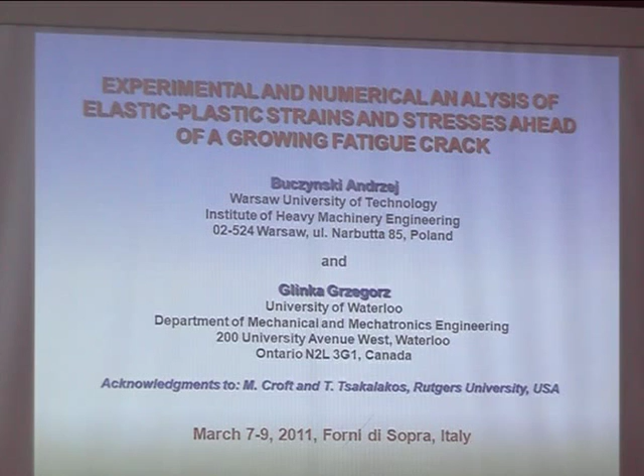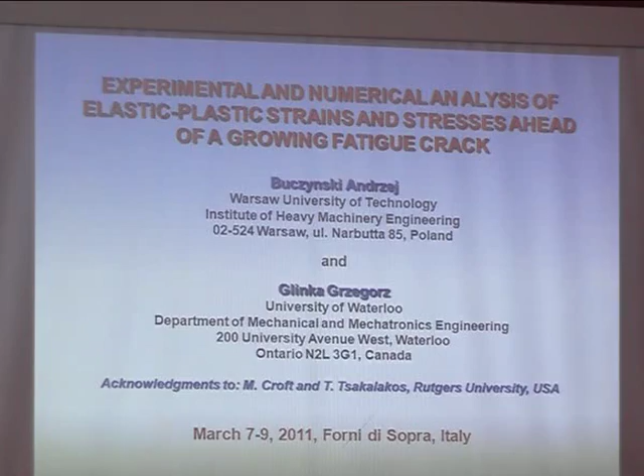It's the first time my performance was recorded, 40 years ago in Sicily when I played accordion at the festival in Messina. And it was a very successful one — I almost got married in Sicily. So now it's over, all these opportunities are over.

The main goal is very similar to what the first speaker was talking about in the morning, that I would like to analyze and find out what's going on simultaneously ahead of the crack and behind the crack tip, without being biased towards whether closure exists or doesn't exist, and what's going on with overload and after overload.

In America, I am sponsored by the Office of Naval Research for the last couple of years by Vasudevan, who doesn't like closures very much. So I am kind of quite a politician, because I get money from them, but at the same time I try not to say that closure doesn't exist. So far it's working.

So here you see — what I am saying is closure does exist, but maybe it's not doing what we think it does. So it's not the same.

What I wanted to know is to compare, using a finite element code, the stationary crack in identical boundary conditions and the fatigue crack, which has some history. Because we cannot do it experimentally, since you cannot produce a fatigue crack without a history. Then we'll see what is affected, what the differences are.

In order to do that, we wrote our own finite element code, because when you run Abaqus or Ansys, you actually don't know what's going on exactly there — how the error is handled, how you jump from one element of the stress strain curve to another, what's going on in the corner. So we did everything ourselves.

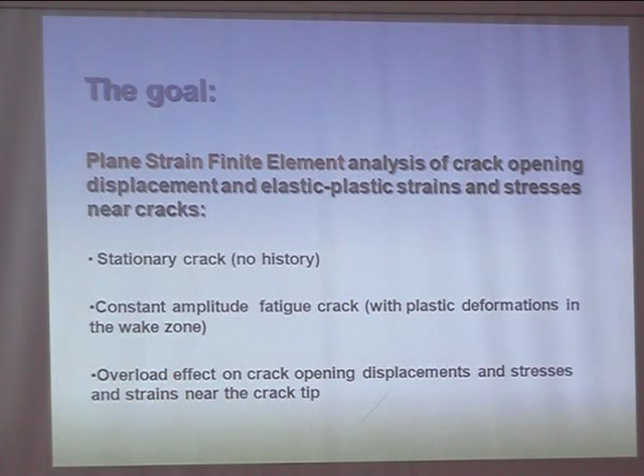Then we ran the constant amplitude, variable amplitude, moving the crack using a specimen like that, a compact tension specimen. We were trying to model the 4140 steel, which was tested later by my colleagues Mark Croft and Tsakalakos using the neutron diffraction method. So we were getting even some experiments.

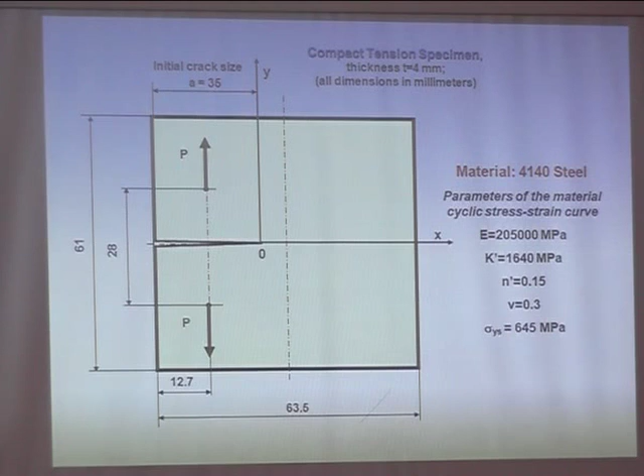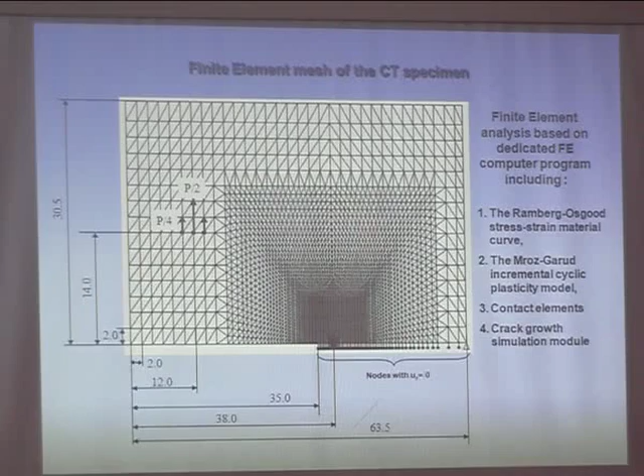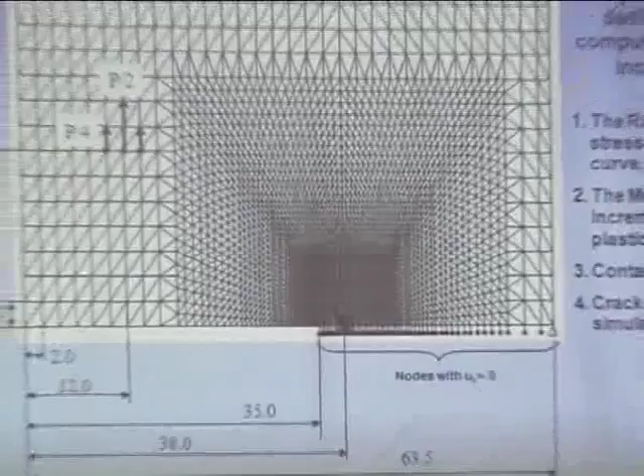We made most of the analysis when the crack reached 38 millimeters, but we started propagating it from 35 to build the history. Because of that, I was making the elements smaller and smaller and smaller. So when it came to the point of taking the data, that was a very fine mesh, and contact elements were introduced there. Everything we knew was going on, so we knew everything except the truth.

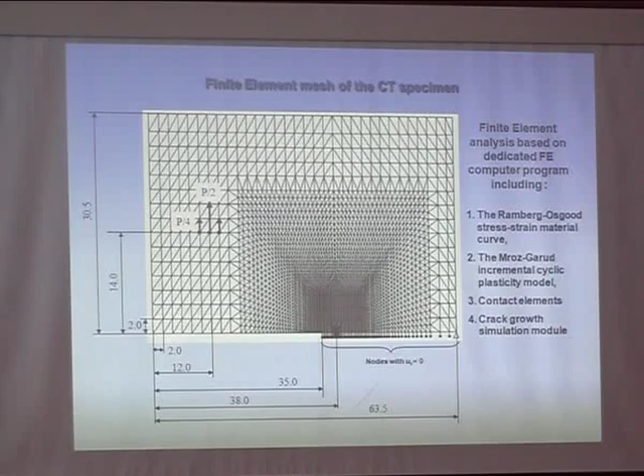My colleague did very nice graphics together with it, and everything was written in Fortran because he's an old-fashioned man — he doesn't believe in C++. We have to know exactly what's going on in the computer memory just to be sure. So he was even showing by colors which part of the stress strain curve that region is — the first element, second, and third — so you could see how the memory was working there.

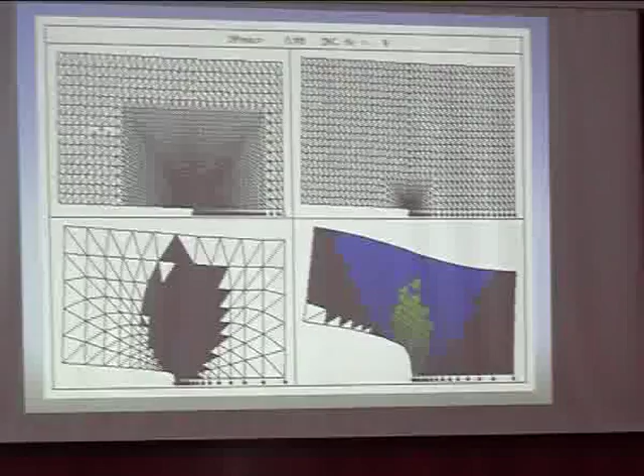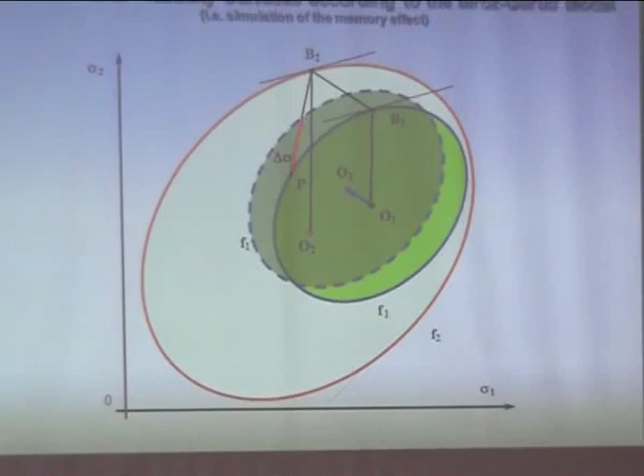Of course that took us — I am ashamed to say — you don't believe how much the calculation took time. It is plane strain, elastoplastic cyclic analysis with incremental plasticity using Mroz's model, because Mroz is my professor and my colleague, so I am biased, of course.

This is the best model I know. It was corrected by Garud a little bit.

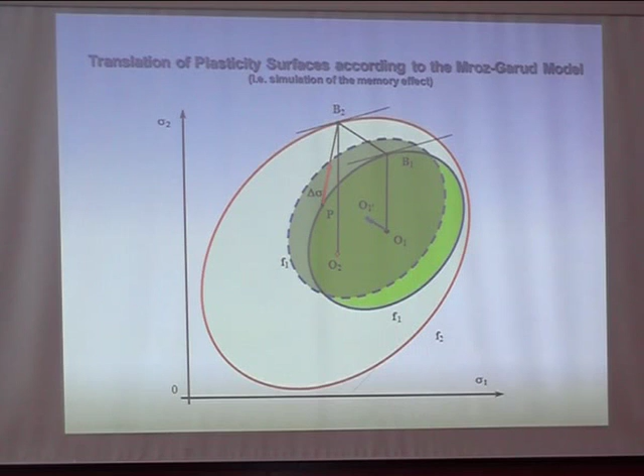So this is the famous plasticity surfaces proposed by Mroz, and you translate them in the stress space. That's why you model that Bauschinger effect, memory, and the cyclic loops, and so on. It's a lot of fun doing it.

And this is how we did the entire program. So I started from 35 millimeters, and then we applied a cycle, as you see, 10 increments per one reversal, but actually there were more iterations, because if that increment went over from one element of the stress strain curve to another, so we had to back up everything and find such a smaller increment here that you ended at the end of linear elements, and then we went further on.

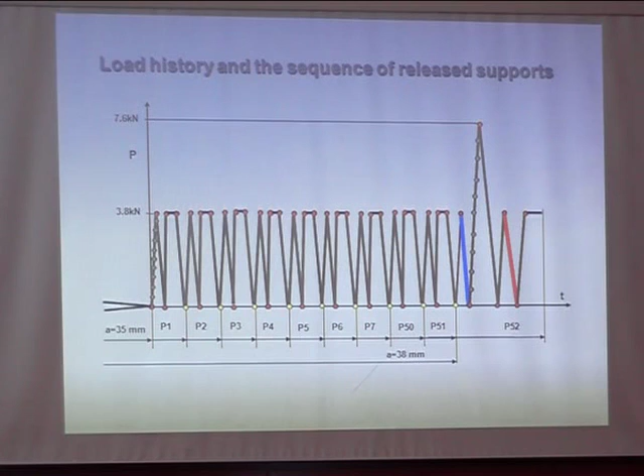So there was a lot of iterations between. This is how we were inputting, but the computer was dividing the stress strain curve even smaller elements just to follow exactly what was given, because otherwise we would accumulate a lot of error. Then unloading was the same way, then reloading, and then we kept the load constant, and we were releasing the first node incrementally again.

That's why the multi-axial incremental non-proportional plasticity was incorporated, and we were doing it cycle by cycle until we reached with smaller and smaller elements. So there were huge amounts of those increments, because we reached that point, and then I analyzed what's going on, what was going there, then we went up, returned, made one cycle, and I analyzed what's going over there. And later on we progressed it further to the maximum retardation point in order to see what was going on after that.

Just let me see whether I mentioned everything here. Yeah.

So I know that I modeled the geometry of the crack tip correctly. And I didn't know, so a couple of years ago we solved that problem analytically for an elastic body, that I formulated the crack problem as a moving boundary problem, so the final boundaries were satisfied on the final geometry, and that way I could derive the relationship between K factor and the radius of the crack tip.

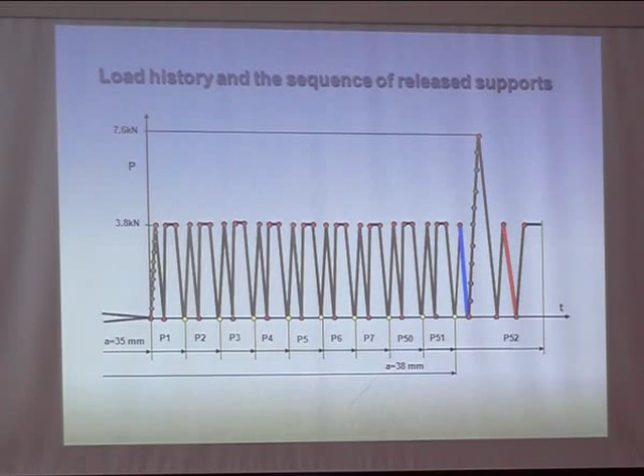The only problem is that I was using small theory elasticity, because if I used large deformations, I couldn't solve. So therefore the stress at the crack tip, at the blunted crack tip, analytically, was equal to the modulus of elasticity.

And when I wanted to publish the paper, one of the reviewers was claiming that my solution is unrealistic because I got very high stress, which is equal to modulus of elasticity. So I responded, you like K factor, when it goes to infinity, it's okay. But when it's finite, it's not okay. But anyway, I believe the displacement fields are okay.

So this is how I chose the element size. It was extremely small at the end, around 1/100 or 1/200 of a millimeter, just to make sure that it was few times smaller than the theoretically possible radius which I calculated analytically.

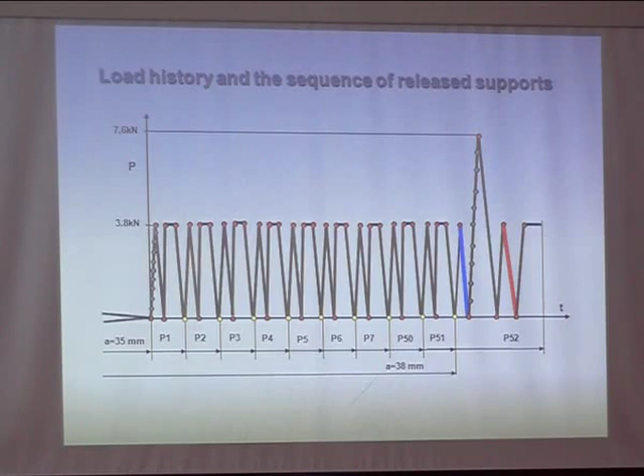There was a contact here, and there is a contact like between these elements, but I don't know whether this is something real or it's coming from this huge rotation when I'm using the small deformation theory. Now, when I calculated the pressure here, or the nodal forces, they were pretty small, so I'm not sure whether it's a real closure or not, but let's look here.

So behind the crack tip, there is a hole, and experiments actually done by nice photoelasticity with a high resolution in Australia by Lewis Jones, show that there is emptiness. He just didn't see anything behind the crack tip. It was a black hole, like nothing was happening in terms of energy and dissipation.

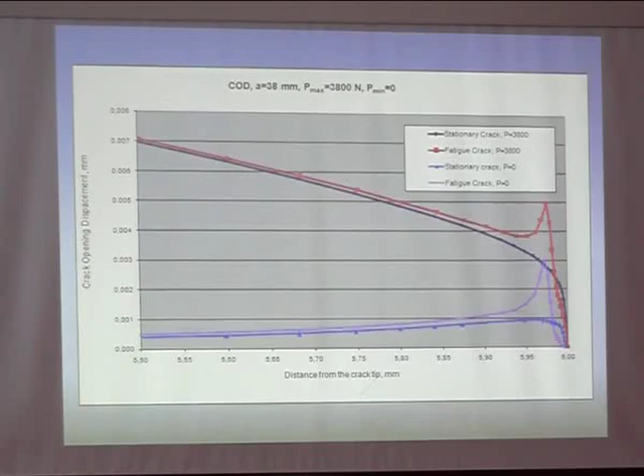And this is a good one, they're mathematically correct, so it's nice, isn't it? The distances on the horizontal - this is the crack tip, and this is the distance. So this is over 5/10 of a millimeter. Okay, that's the distance.

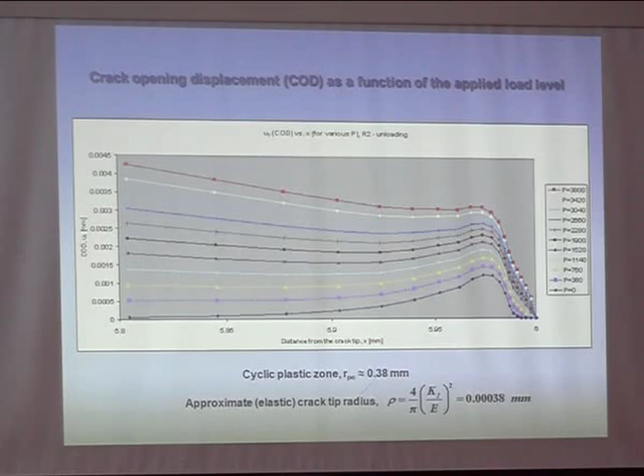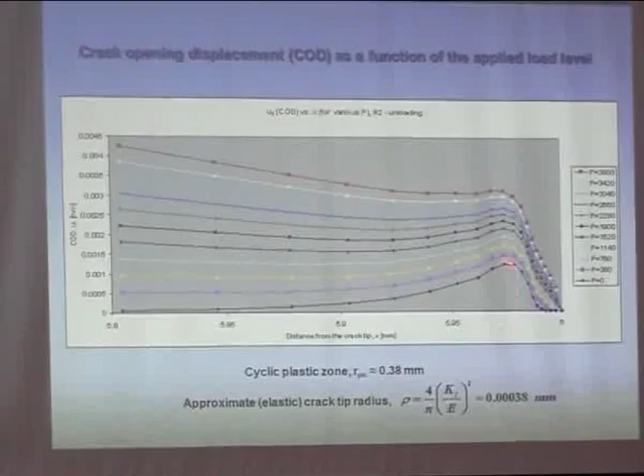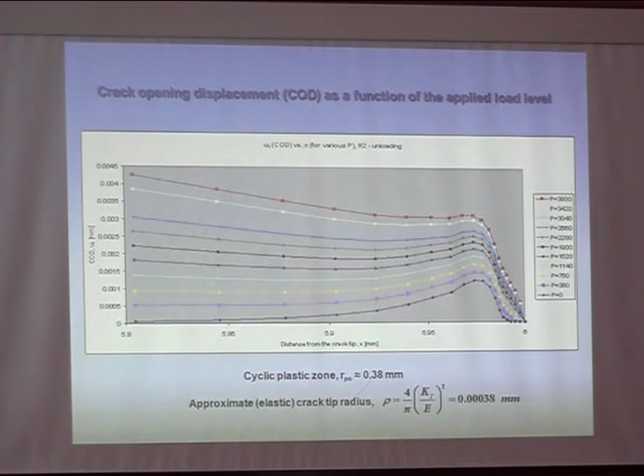No, the crack tip is here, that's the opening, and the stress field will be here. This opening we have also seen experimentally, and it must occur, otherwise you would never see a closure behind. Furthermore, you need this volume here for the representation after - this is the emptiness. So I concluded that I can model the crack as a crack with a radius always, empty hole. Even if you apply now compression, you will get a nice hole here with the concentration of 3. That's what my computer says and my model.

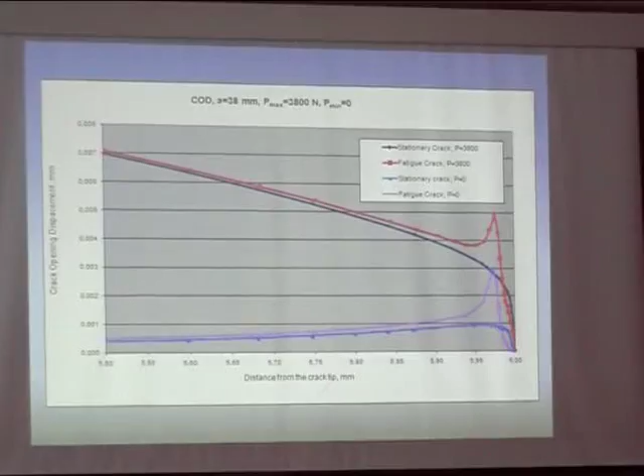Now we went to the comparison. I said, okay, let's zoom it a little bit. So what you see here is a 0.5 millimeter distance. I did the same calculation for a crack without history, what I called virgin crack, which was elastoplastic, everything the same, except that crack was not propagated - I only started with 38 millimeters. So what you see here is the displacement field for the fatigue crack, and that one is the displacement field for that virgin crack at maximum load.

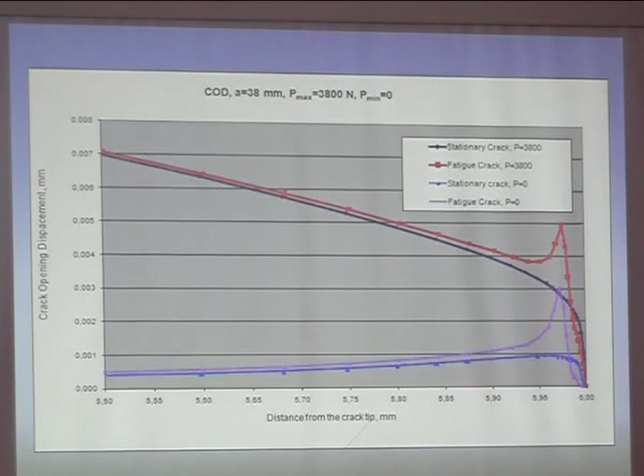When we went to the minimum load, here again is the displacement field at zero load of the fatigue crack, and this blue is the virgin crack. So when we compare them, and I zoom everything a little bit, you see very clearly this is that kind of ideal crack without history, and this is crack with history. There are two different displacement fields at the same K, the same crack length, everything the same.

So if there are two different displacement fields, my conclusion is that there are two different stress intensity factors. Therefore, the history of the crack is affecting not only the minimum but the maximum as well. Should we take it into account later or not is disputable, but that's what I am finding, and this is in agreement with your experiments.

I almost jumped when I saw it, because for the first time, the Canadians and British agree over the ocean. And I think this is because the Polish scientist is negotiating.

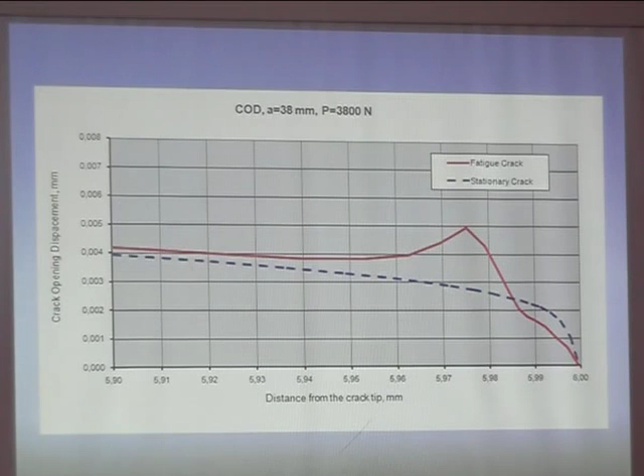Of course, when I said this first, my sponsor was very happy. Jim Newman said that I am talking nonsense. But we negotiated with Jim and it's okay now.

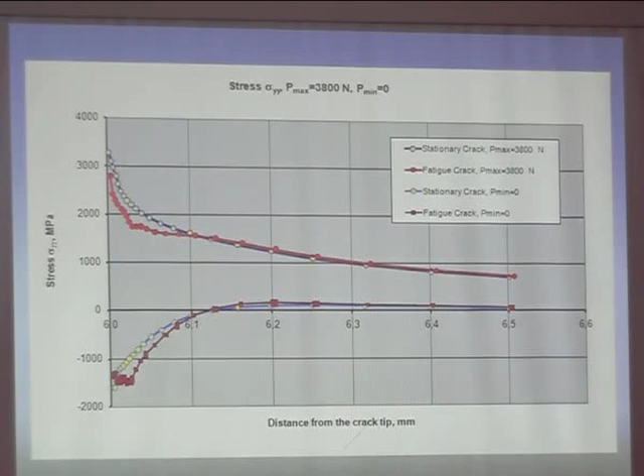But you see, this is only finite element - it means it doesn't need to be necessarily 100% true, but qualitatively it gives us something. So what I did next, I said let's go to a point ahead of the crack tip and see what is the stress-strain response. So I chose, as you see, the fourth node in order to be away from that first element, which was corrupted so much because of huge rotation and deformation.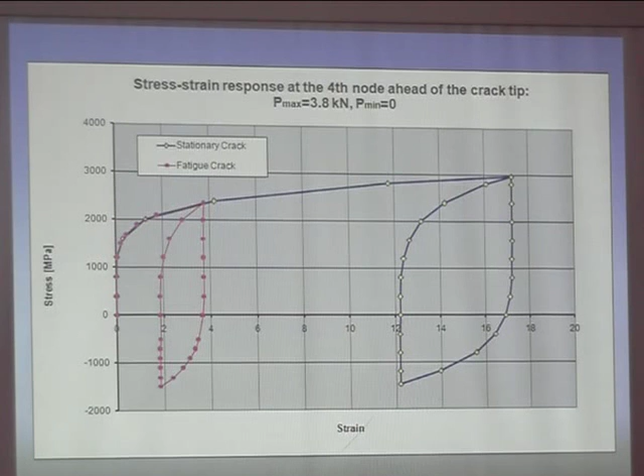The results were pretty consistent throughout that case, but it was interesting to see what's happening before and after overload. We applied the overload and propagated the crack by 1 or 2 elements. Looking at that was surprising to me—this is the displacement field after overload, and this is the displacement field at the minimum load after overload. So this is the maximum, this is the minimum.

What you see here is that after reaching a certain load level, the displacement in this region was getting a little less, but in this other region, the displacement seemed to be the same—they don't move. So if you measure the relative change of displacement behind the crack tip, you would assume this is closure, because the opening displacement doesn't change anymore. But that doesn't mean the crack is actually closed, according to this analysis.

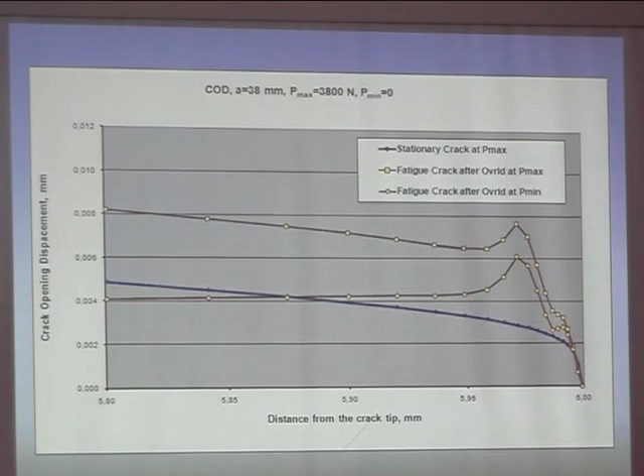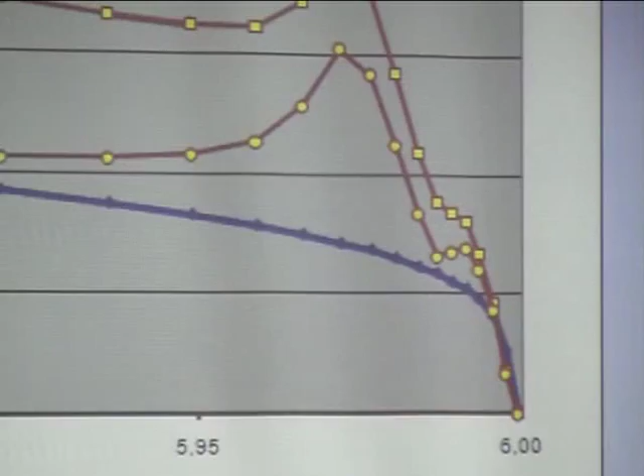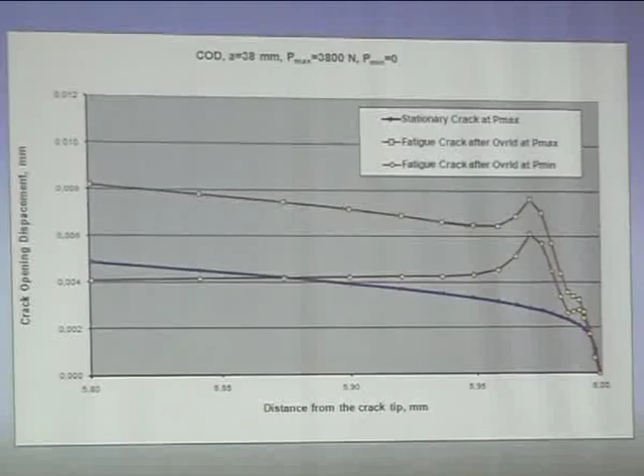Very often I think—though I'm not 100% sure—that in experimental measurements, when there is no change of displacement, we say it's closure. But it doesn't need to be that. It can just be that the plastic zone is becoming so hard that it doesn't deform anymore. And why? That was a kind of puzzle to me. When I looked at the stress, which I'll show later, there was something strange going on—the plastic zone did not deform.

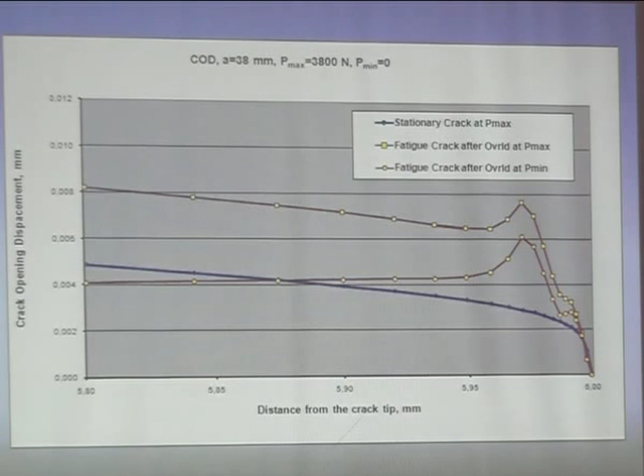The reason, as I found in the end, is that there was a huge change of triaxiality. I started with plane strain, but when I did overload and underload, there was so much triaxiality that it was almost a hydrostatic stress state. As we know, a triaxial stress state does not allow for any plasticity—it becomes very hard. At least from that point of view, that explains the thing.

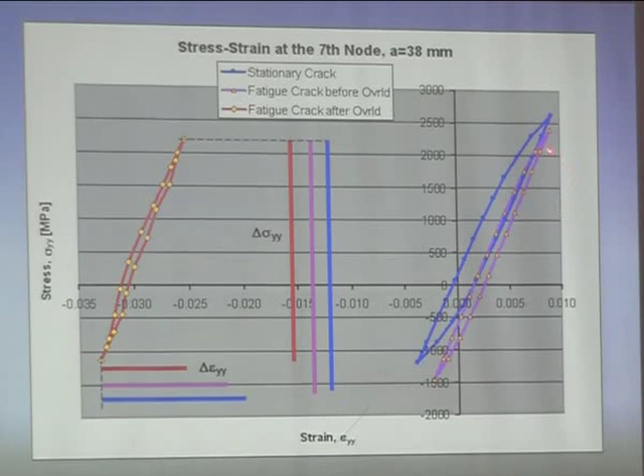So I went to these 3 cases. I took the hysteresis loop at the 7th node, even further from the crack tip, in order to get reasonable strains and stresses. I compared the hysteresis loop for identical cycles for the stationary crack, the fatigue crack before overload, and the fatigue crack after overload. The blue one is the stationary crack, and the other is the constant amplitude fatigue crack—the stress ranges are almost the same, and even the strain ranges don't differ much, but those are mostly elastic strains, whereas here there is a lot of plasticity.

After overload, the same cycle was causing almost no plasticity at all. We measured the same strain, but it was mostly elastic—the hysteresis loop was almost zero thickness. I think that's why the displacement didn't change: it was essentially a hard particle. The plastic zone didn't have a chance to expand.

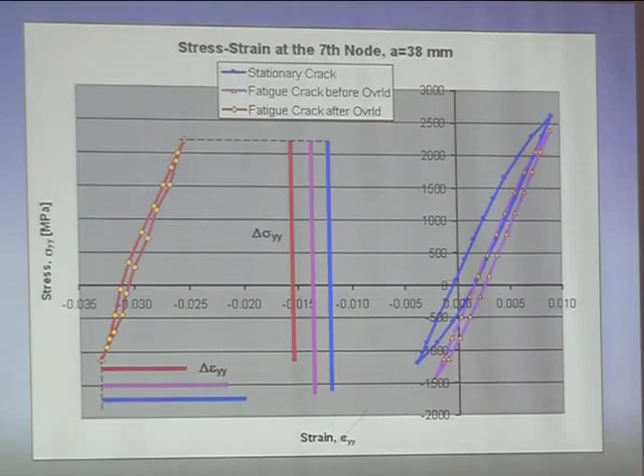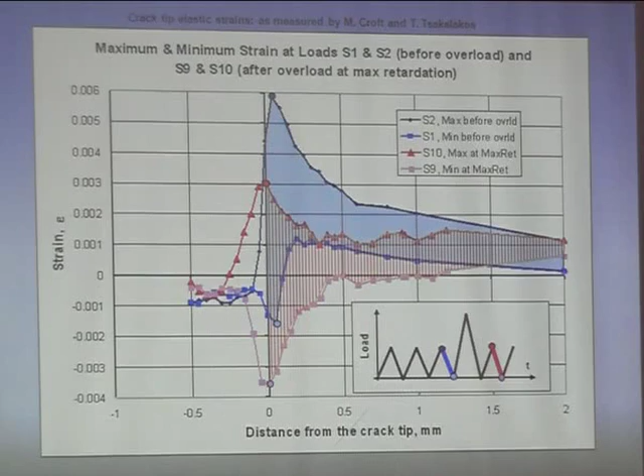In order to see further, in terms of stresses and strain ranges, there are some changes from here to there. You can see very clearly that the change in strain is significant because it's on the almost flat part of the stress-strain curve.

So we're saying the elastic strains are almost the same, but does that mean the elastoplastic strains will be the same? When you look at elasticity, you may think it's the same range. But if you take the triaxiality into account and plot the stress-strain loop, that loop will be much narrower for the red case than for the blue case.